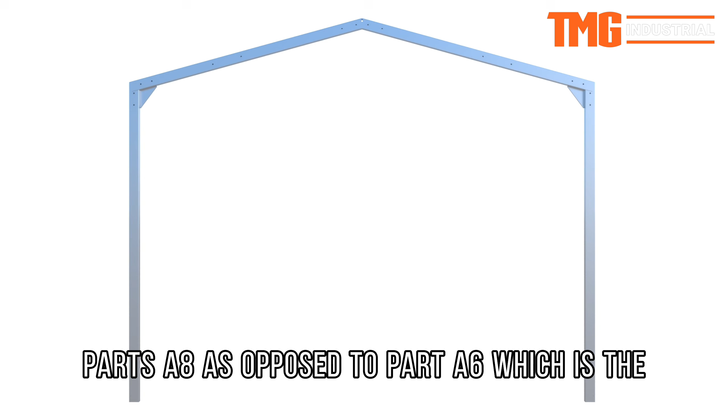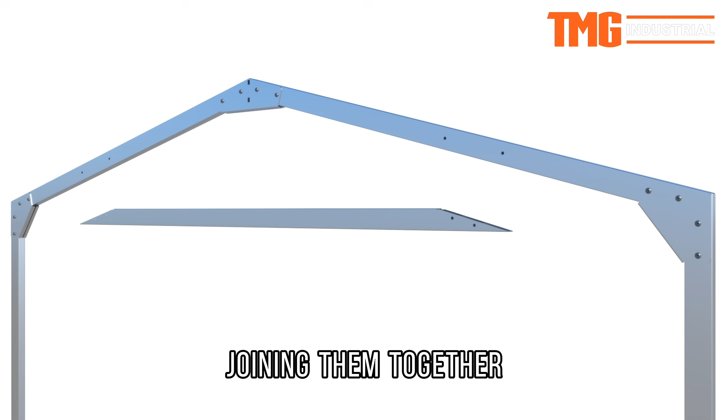We'll start by preparing the trusses for the shelter. This is done by assembling parts A8 as the posts to part A6, the upper rafters. Each side of the truss system will be connected with part A4, joining them together, and below that, part A7 is a cross member which stabilizes it.

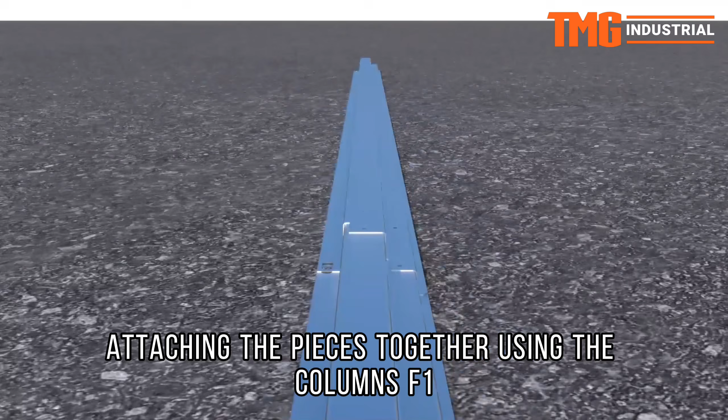Now we will start assembling the base, attaching the pieces together using the columns F1, the fasteners, to put them together, and part J8 will join them.

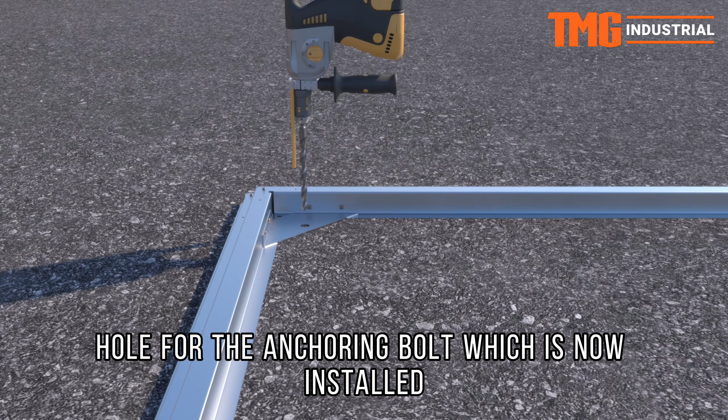We'll bend the prongs up and install the screws and continue to lay out the foundational pieces. We attach part J1 into the corner to secure the foundation together, and here you can drill your hole for the anchoring bolt, which is now installed and expanded by tightening the nut. And the same thing for this corner.

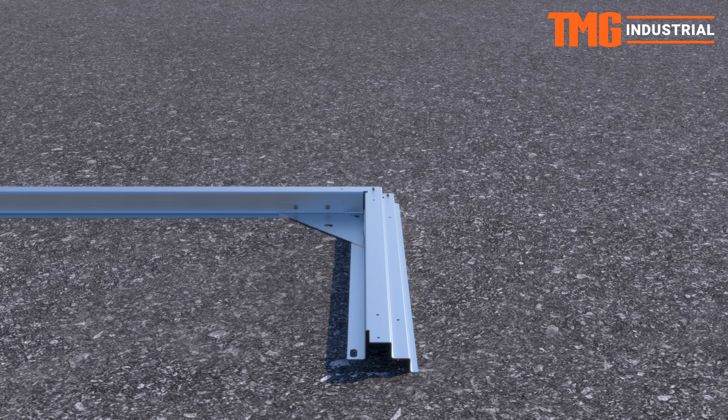Now we'll place part J1 on top and drill more anchoring holes, followed by our expansion bolt to be installed to anchor the structure again. Here we're just installing the rest of the anchoring bolts.

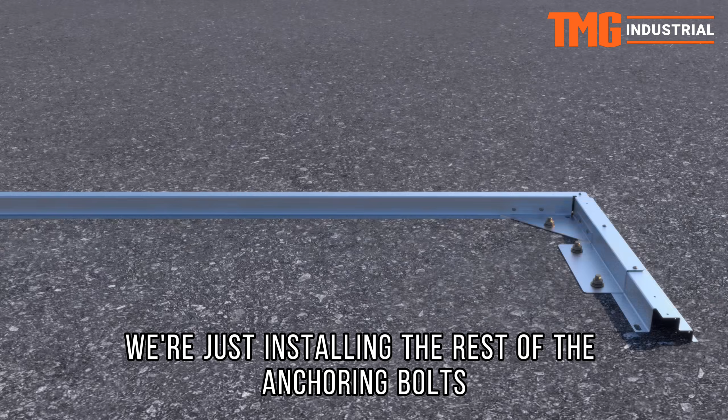Now we can begin laying the siding for the unit. As you can see, P4 goes first, followed by P3, and each of these are held in by the screws at the bottom, F1, and then the S3 will go on the back side to protect the sharp edge. Now the 23L is laid inside as the framing, along with the 6R on the back side of the panel.

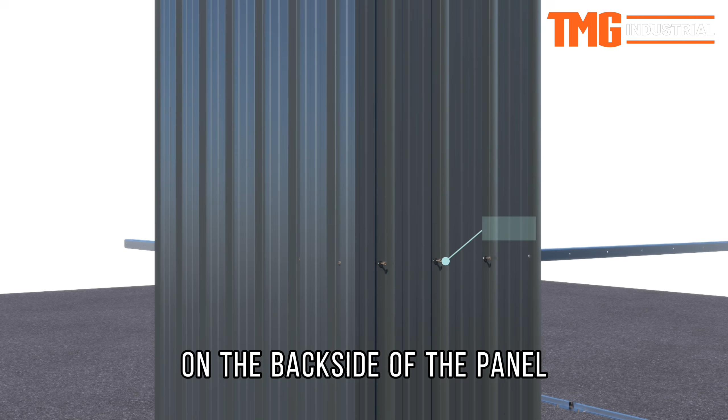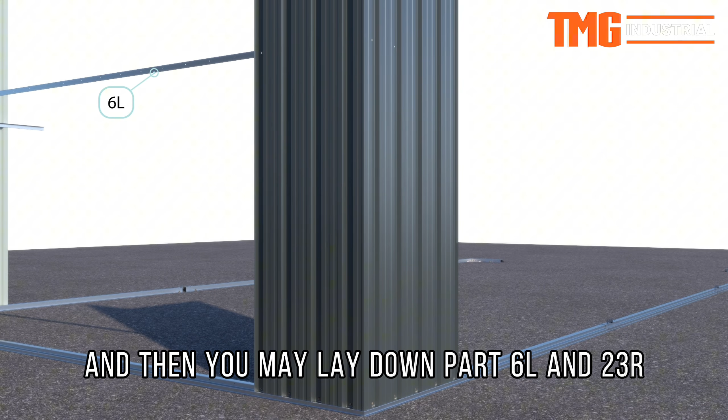Place P4 on the opposite corner with P2 perpendicular to it. Secure them in place with the self-tapping screws, and then you may lay down part 6L and 23R to continue framing. Proceed to prepare P10 and P3 on the front right corner of the shed, and secure these in place

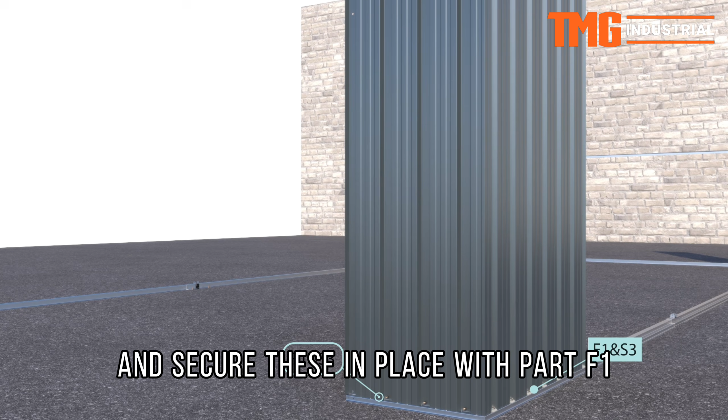with part F1. Then you may continue to put 12R in the center of the frame and proceed with the rest of the corner paneling.

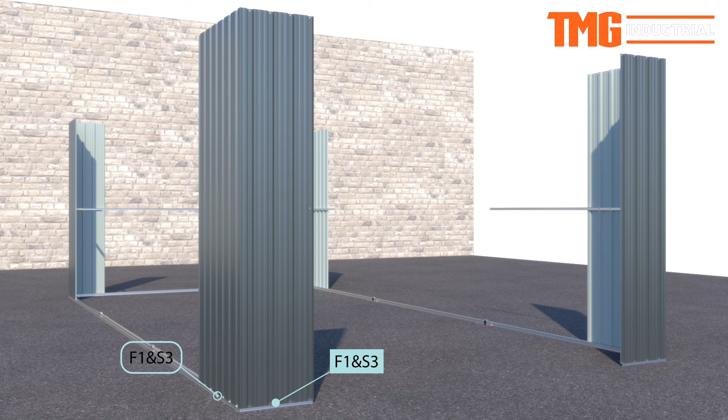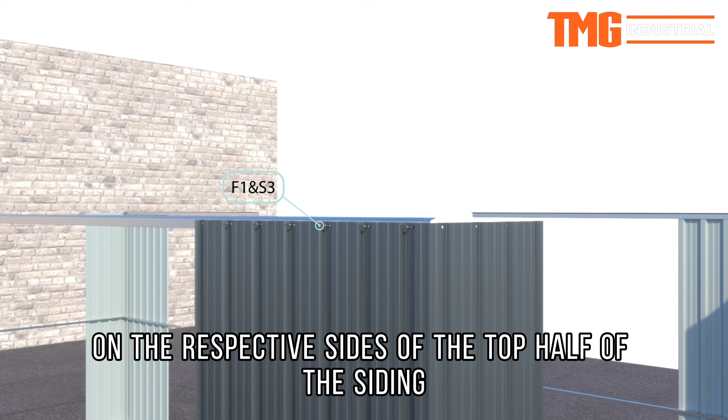Now we'll begin assembling the top half of the framing. Place 8R and 8L on their respective sides of the top half of the siding. Affix them in place with part F1 and place the truss columns into the center of the structure as shown. They can be secured with part F1.

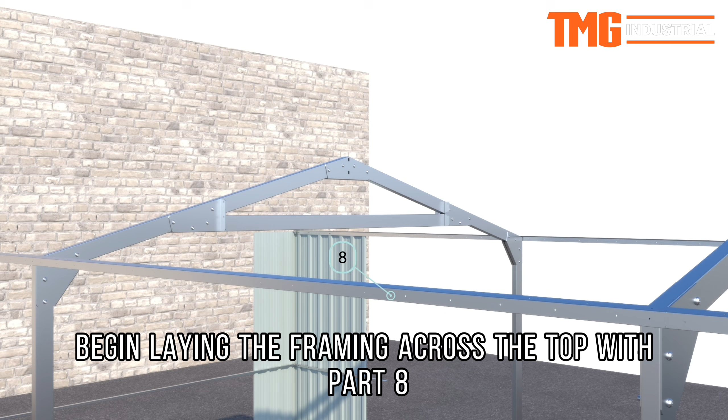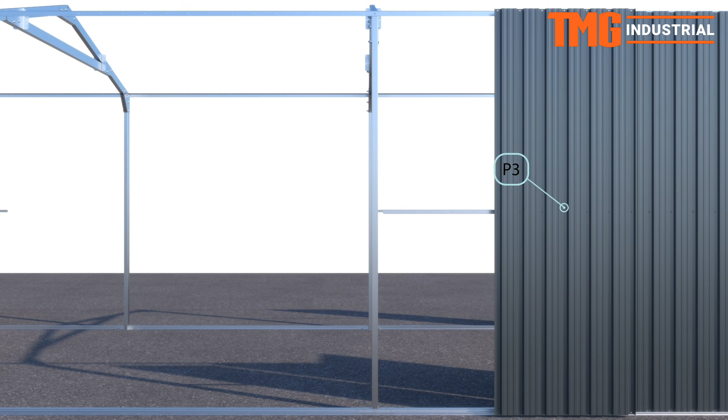Begin laying the framing across the top with part 8 to complete the frame. Now you can continue to add the siding as shown. Secure them in place using part F1 and make sure to only overlap the corrugations by one strip and line up the self-tapping screw holes.

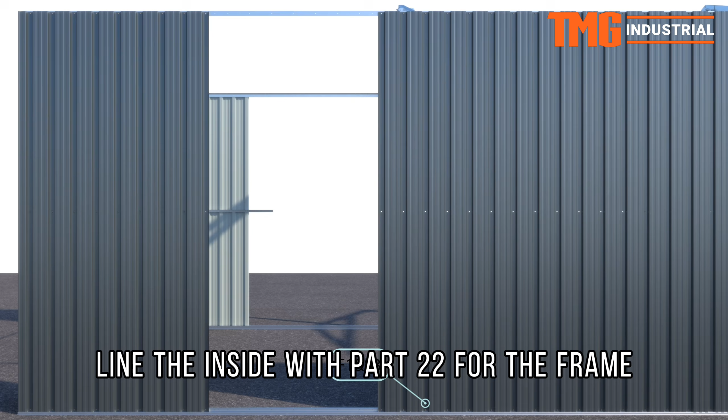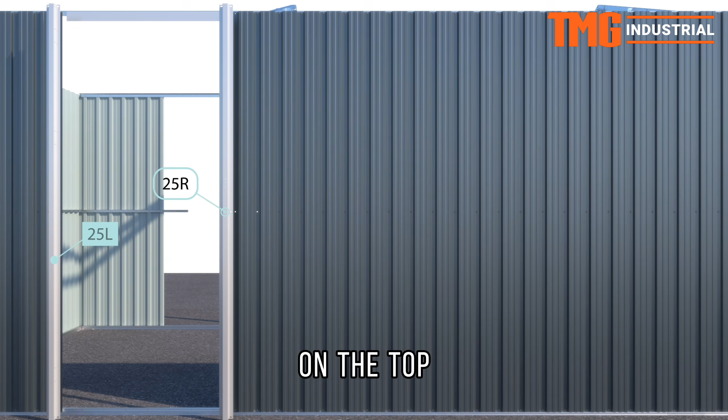Line the inside with part 22 for the frame and secure it with part F1 and S3. You can begin preparing the flashing for the door with part 35 on the top, 25L on the left, and 25R on the right, and secure it with the respective fasteners.

Now you may continue to line the back of the shed with its panels as shown. Secure them in place with part F1 and S3. Continue to line the panels on the other side of the shed as shown and secure them in place with their respective fasteners.

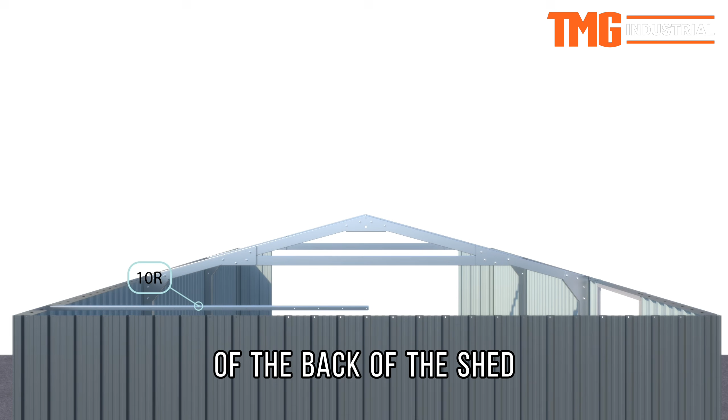Place part 22 on the inside of the wall that you just assembled and put the fasteners in place as shown. Now you can begin lining the top half of the back of the shed. Place part 10L and 10R on the back of the shed in their respective positions.

You can begin assembling the flashing for the front door using 5R, 5L, and B6. Secure it in place as shown with its respective fasteners from each side.

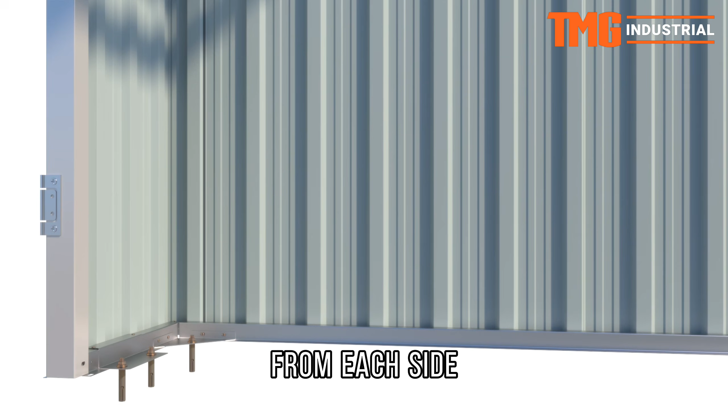Begin placing the framing on the top half of the front section of the shelter using 7R and 7L, and lay part A10 across the top as the frame for it to be covered by part 7.

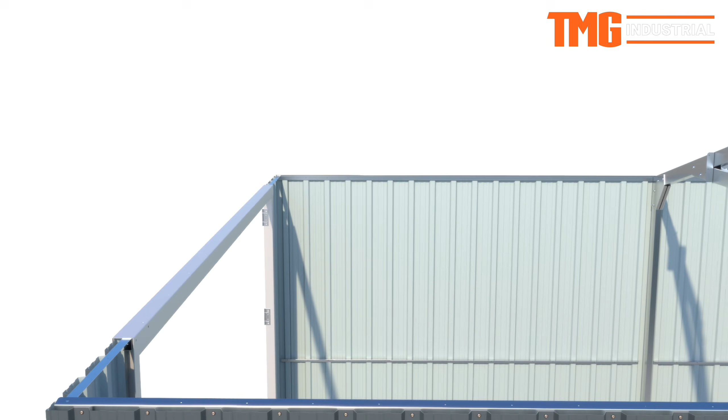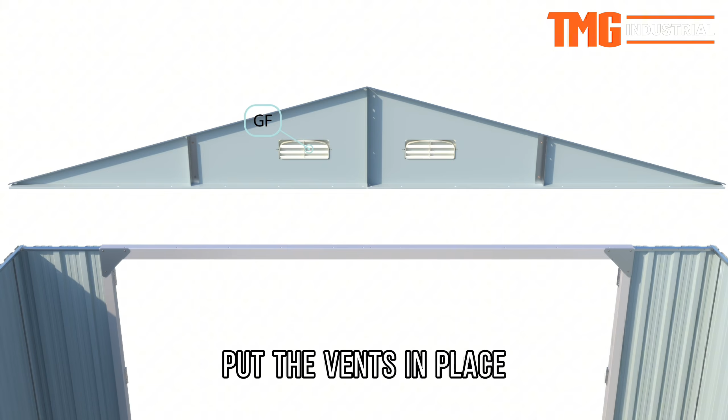Place the brackets J4 on each corner of the door and fix them in place. Then proceed to put the peak of the structure on with parts 21L and 21R. Put the vents in place along with the rest of the framing and secure it down. Here we're putting the cross members across part 12 between the center columns.

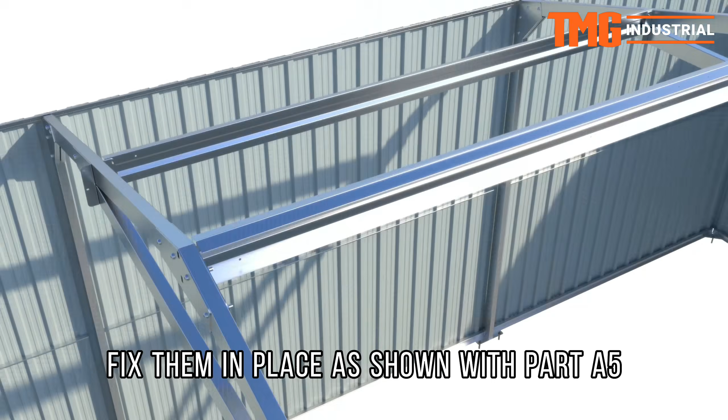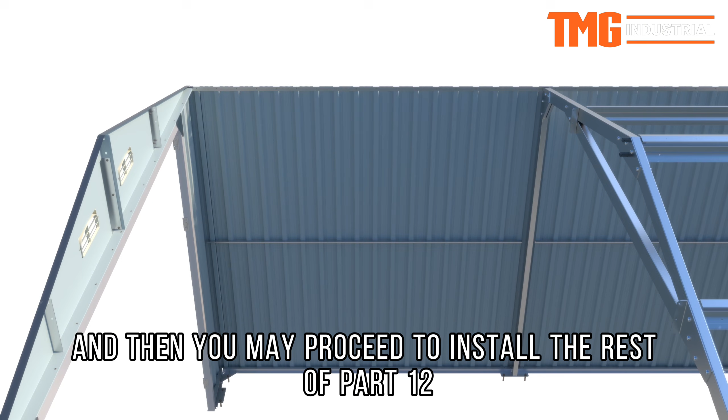Fix them in place as shown with part A5. Part F2 will secure them further, and then you may proceed to install the rest of part 12 in their respective position. Assemble the rest of the peak using part 13 and 14, secure in place with part F2.

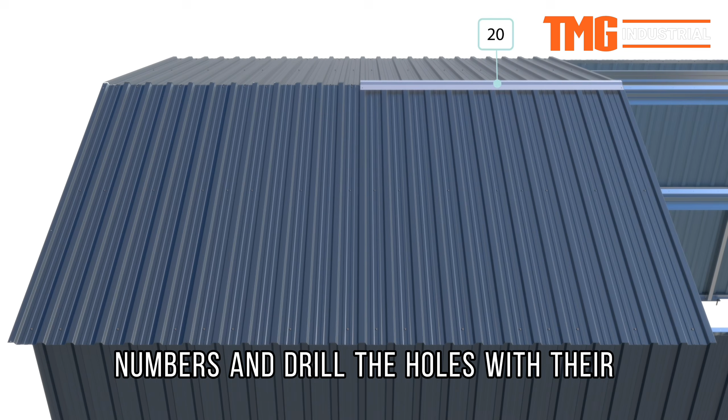Now you may begin assembling the roof of the structure. Place the panels as shown with their respective part numbers and drill the holes with their outer diameters as shown, and put the self-tapping screws in according to where the frame is inside the structure. Then put the ridge cap on and continue to assemble the rest of the roof.

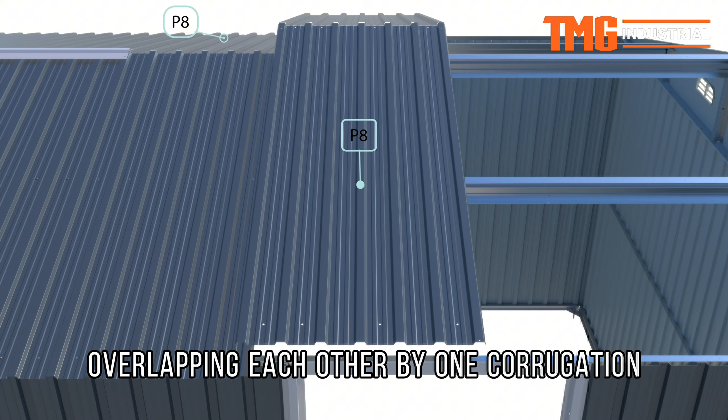As you can see, we'll just continue to place the panels down, overlapping each other by one corrugation and fastened in place with part F1 and S3 on the back side to protect. Then you may finish the peak with the parts of the ridge cap number 20, which is held down by

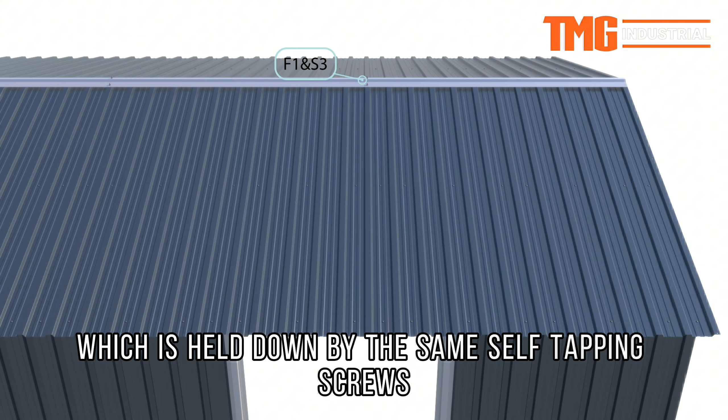the same self-tapping screws. And on the back side of the structure, part 17 and 18 will line the peak in order to create a flashing.

Place GE on the end of the peak and secure it in place with F1, and place 15-1 and 15-2 on either side of the shed. This is held in place with part F1. And put part GC to secure the corners.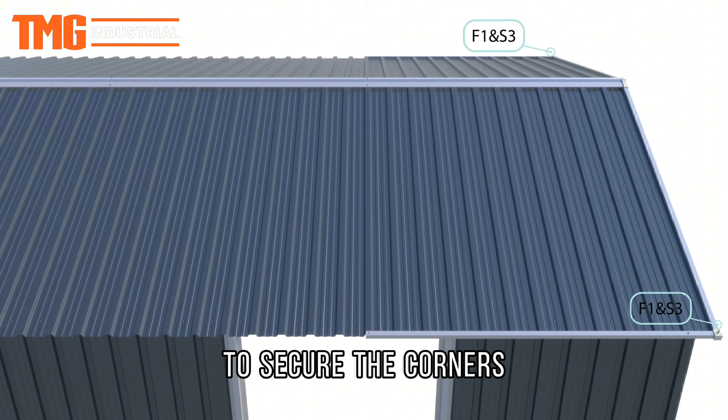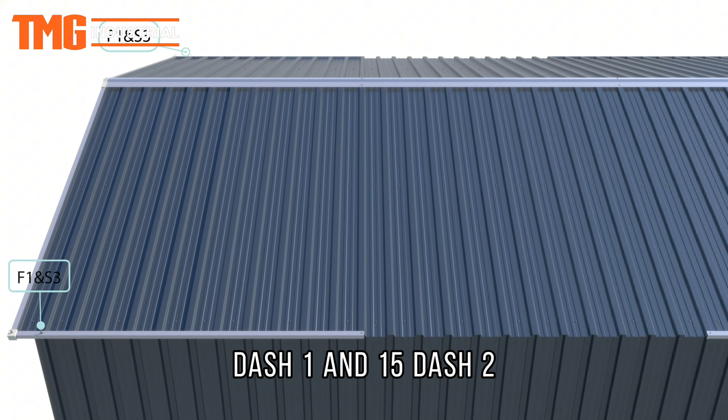Then you may continue to line the roof with part 15 and 15-3 as shown, and then hold it in place with F1 and S3. And do the same on the back side as shown with part 15-1 and 15-2 until you get to the center, where you will finally place part 15.

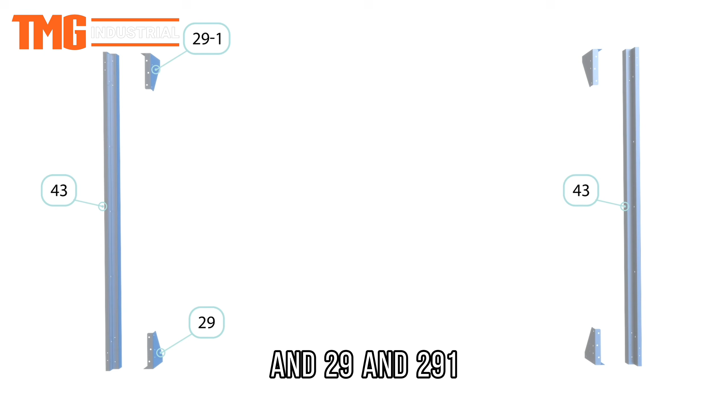Now we'll begin preparing the front door with parts 43 and 29 and 29-1. Proceed to frame the door with part 44 and place the paneling with D1 and the cross member with part 50, which is secured with part F1 and F2 in the center.

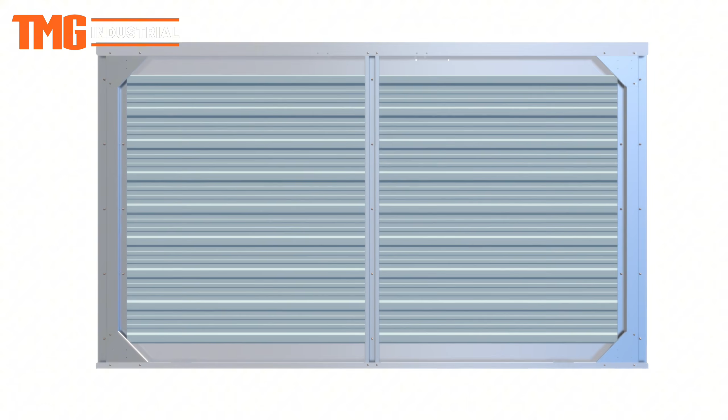Then you can complete the fastening as shown on either side of the door. Place part 48 and 49 as reinforcements and hold them down with F1. Put H2 at the base of the door as a lock and part 36 at the other end, which is held in place with F1.

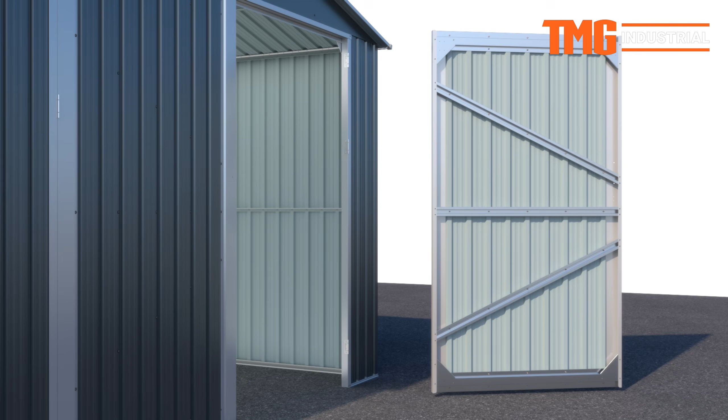Complete the rest of the fastening and you're ready to assemble the door with the rest of the shed. Hold the door in place with parts F3. Repeat the same steps as before to complete the door.

We'll begin preparing the man door with parts 40, 41, and D2 as the paneling. Use part 39 to reinforce the center and fix it in place with parts F2. Now complete the fastening as shown in the video and place the rest of the reinforcements, part 37 and 38, across the other parts of the door.

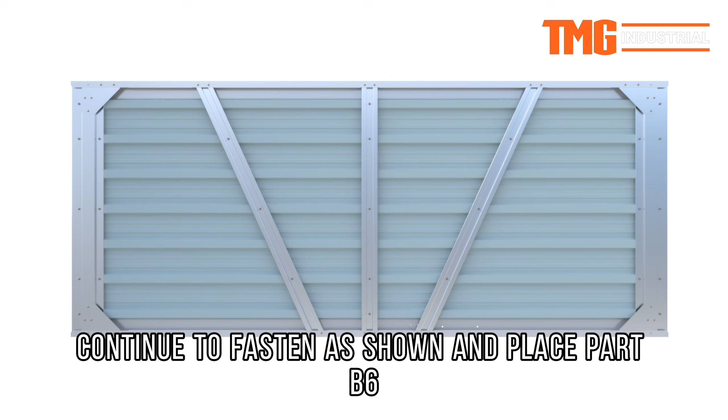Continue to fasten as shown and place part B6 as the hinges so you can attach the door to the rest of the structure as shown with part F3. Now you may place your clasp, part H3 with part F3 to lock your shed and keep it protected.

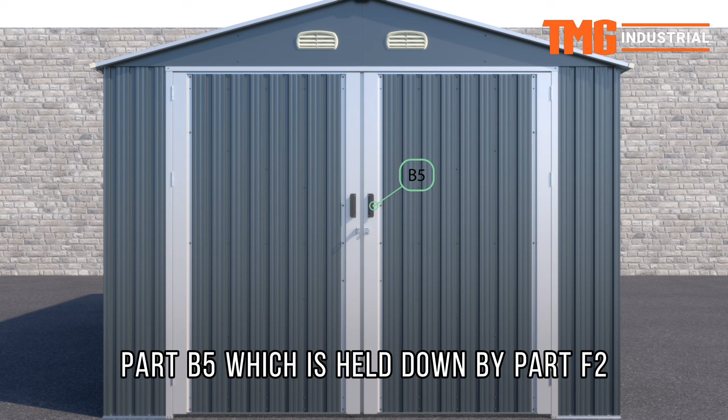Proceed to place part H1 and B5 and fasten it down in place. Repeat the same steps on the front door. Now we're placing our door handles, part B5, which is held down by part F2. And the shed is now complete.